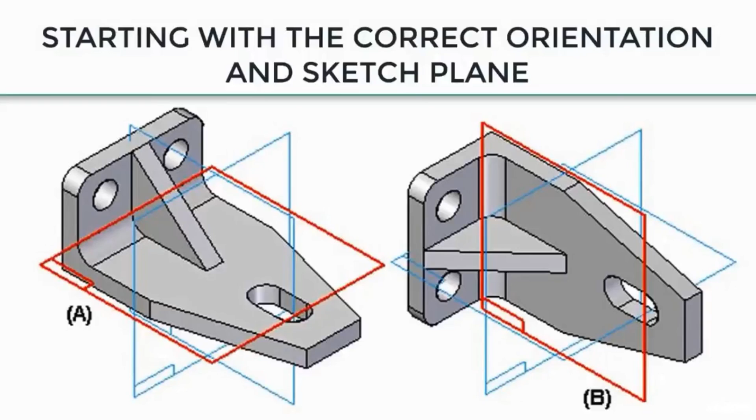Now it's important that you draw your parts in the correct orientation. You could draw this part in any orientation, but it's really annoying if you go back to the isometric view, Control I, or you go back home and the part's always flipping over on its side or upside down. So you need to understand where you are in 3D space.

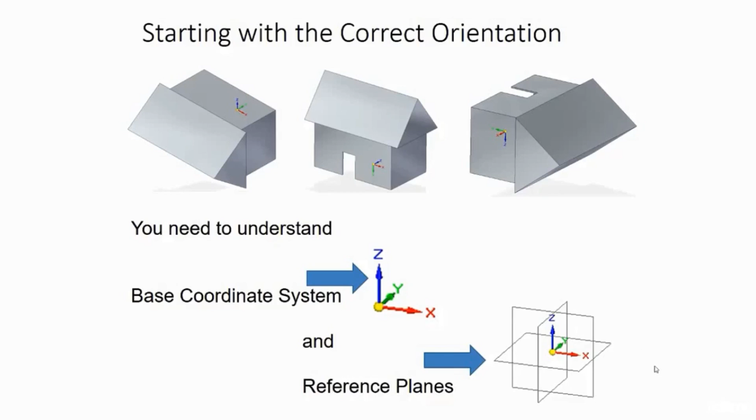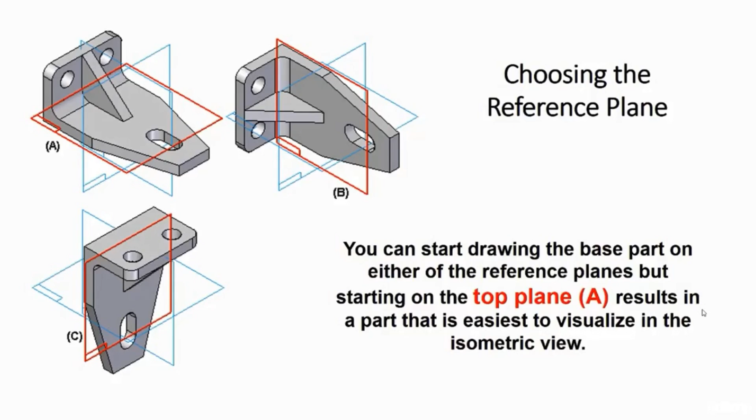Now you could start drawing the base part on either of the reference planes, but starting on the top plane results in a part that is easiest to visualize in the isometric view. Now the next decision you have to make is, where do you start the part? There's lots of different ways to start a part. You could start here with sketch A and push this across and cut off these edges. You could start with B by drawing this back piece, or you could start with C.

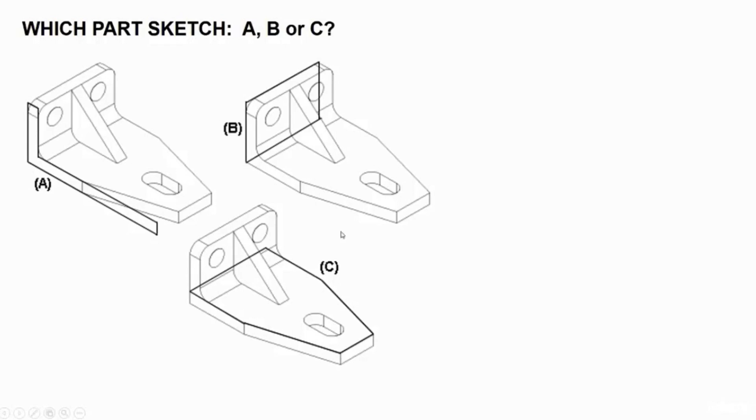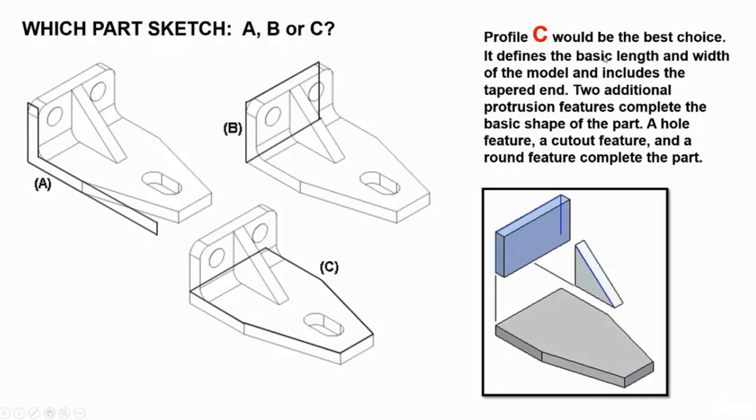Now another really important thing to do is, when you look at the model, break the model down and take out all these smaller features. Take out the holes and imagine it without this slot here. What would the part look like? It would break into 3 pieces. And in this case, profile C would be the best choice. It defines the basic length and width of the model and includes the tapered end.

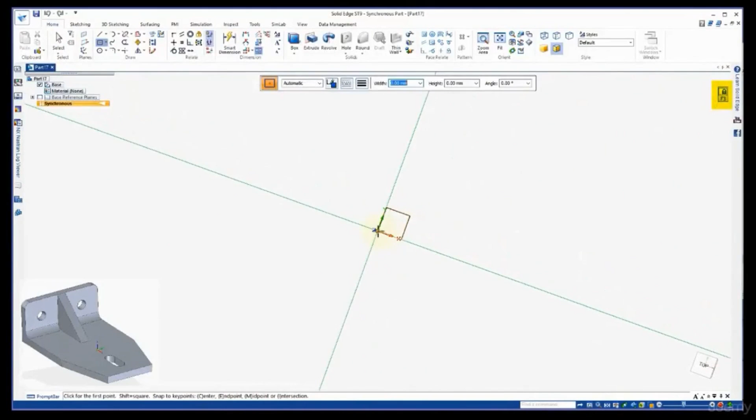So let's go ahead and draw that part. I'll start with a rectangle by center, and I'm going to spin around to the top view, and I want to make sure I lock to that plane, and I see the lock up here, and I'll just draw a rectangle about the shape. And this is just the concept model. And then I'm going to go down to my sketch view and lock to that.

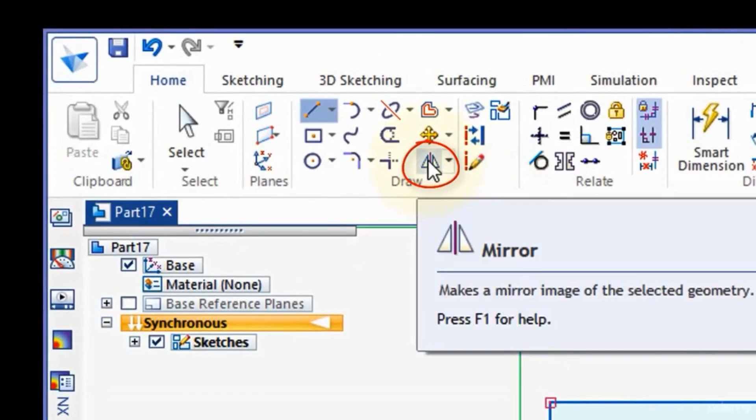I'm going to come up here and draw a couple of lines right from the edge there. I could draw another line here, but I'd like to show you the mirror command. I'm going to select the mirror command, select the line, and I'd like to mirror around the x-axis. And so there's a mirror copy of that. Now I'm ready to extrude this down. Again, it's just a general concept, and I don't want this to mirror, so I just want to push this down.

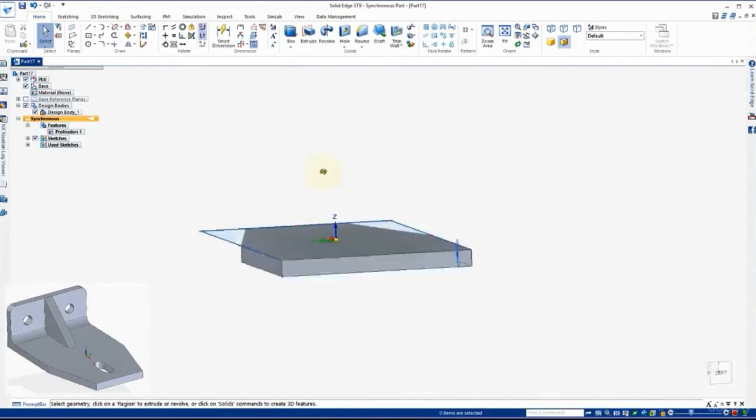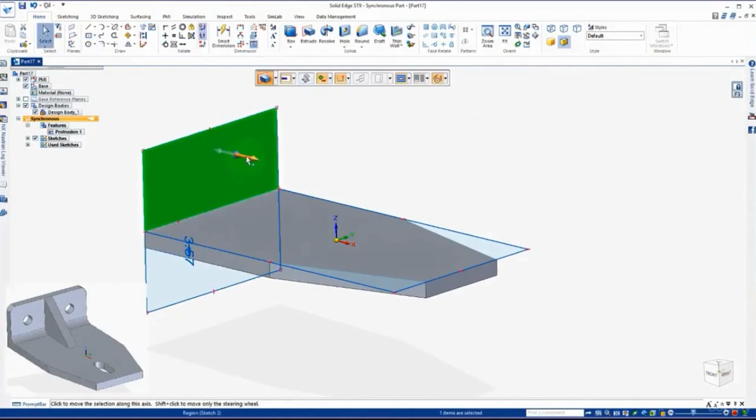Now I'm ready to add the back piece, so I'll spin it around to the back, and I'll go to the rectangle again. And I want to lock, so I'll lock back on. I'm going to draw a rectangle right at the center, and I want it to come out, say, this far, and the back is about that big. I did it like that because all I need is this one region. Once I've got the region, I can just pull that in. And again, just a general concept.

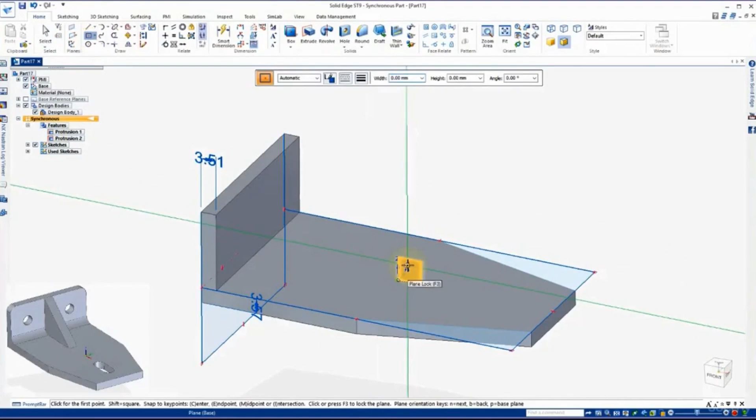And now I need to put this center piece in here. It was critical that I drew this around the axis. If I hadn't done that, I'd be having problems right now. So again, I'm going to go to the rectangle command, and I'm going to use this center axis, the XZ, lock to that, check it in my sketch view, and this time I'm actually going to use a rectangle by 2 points. I'll pick on this bottom corner here, and there's my height, and bring that out about how far the triangle goes out. Then I'm just going to draw a line from the top to bottom.

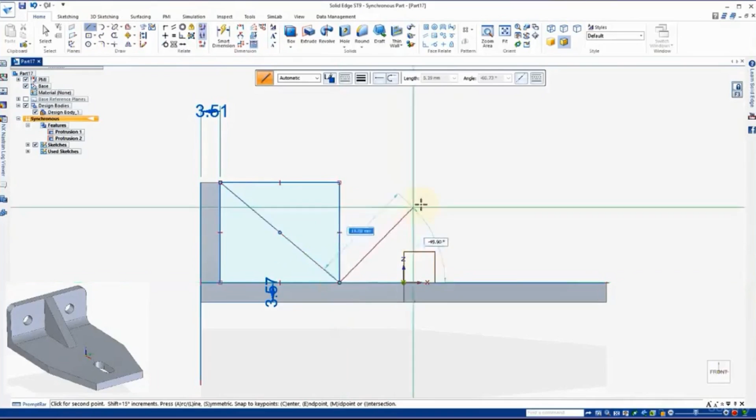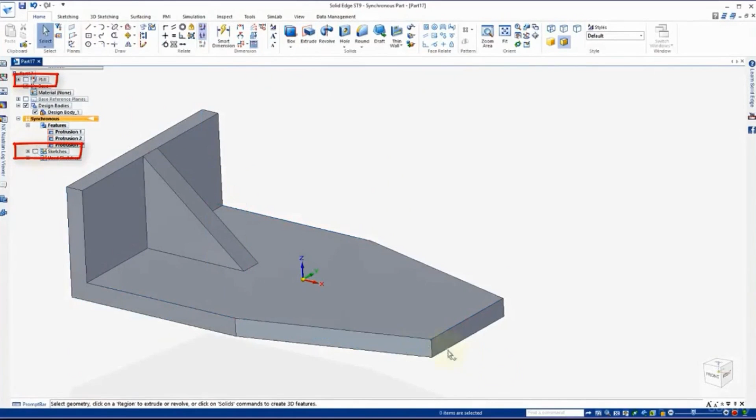Again, many ways to do this. I just wanted to create a region though. So I go to select, and I pick this region, and you'll see as I pull this out, I actually want it to mirror both ways because this is in the center. So I'm going to use my symmetric option and pull that out. Now I can turn off my sketches. I'll fit my view, and I'm ready to do the holes.

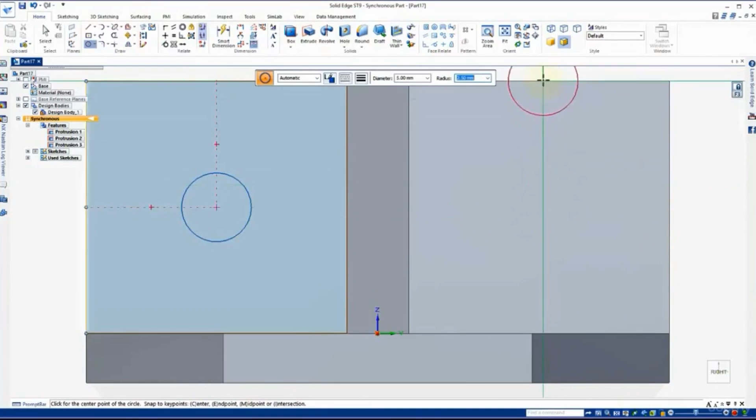So I'll go out and pick this reference plane, and I'll go back to my sketch view, and I'd like to center this, so I go to the center of this line, and there it is. I'm going to put in a number here, say 5. And why do I do that? Because I've got another circle to put in over here at the center. So once I find my center, I know that is also 5. I'll just identify these 2 regions, hold down the control button, push that through. And I've just got this one last slot to do.

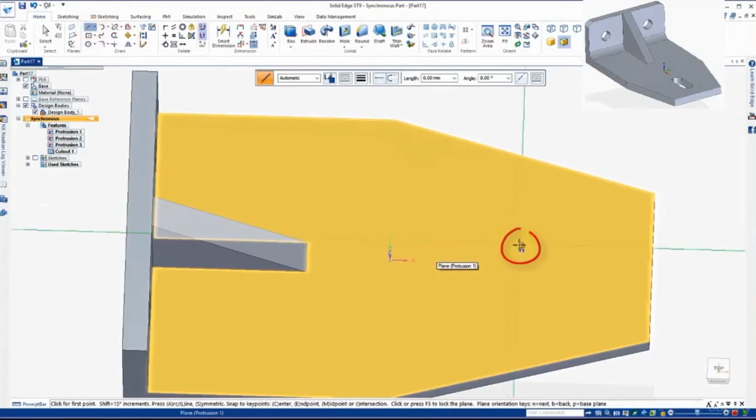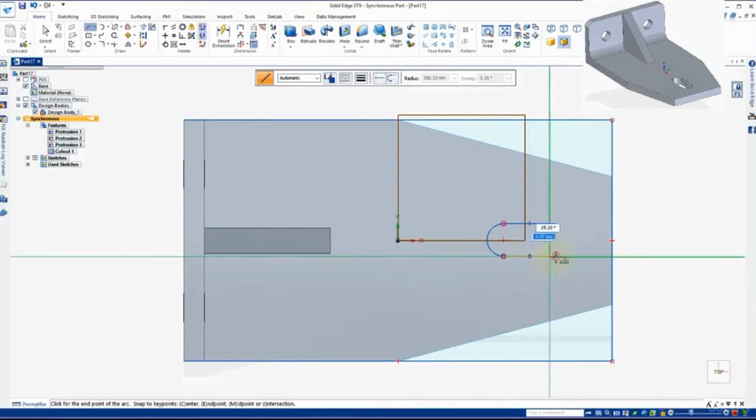So I'll come out here, and I'm going to start with a line command. Again, a number of ways to do this, and I want to be on this face here. I'm going to start sketching just the general concept right here. I'm going to hit A for arc, and come back over, line up, and again I could just pick the arc from here also, and see it's not going where I want it to, so I come along. Remember how I run along there and bring it back around. And my constraints are on there.

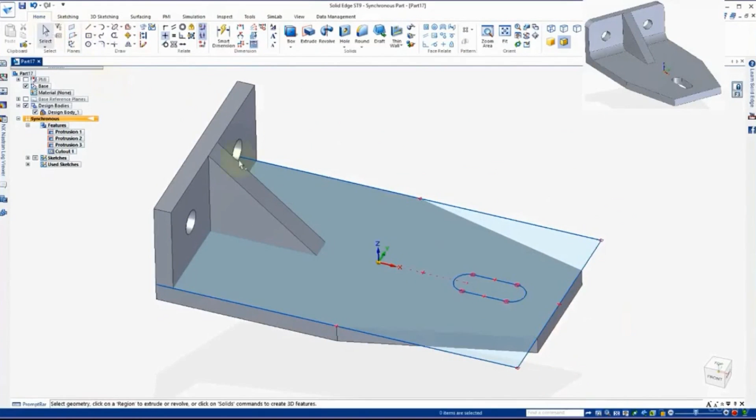Now one thing I do need to do is make sure this is centered. I want the center of the circle, and I just sweep across center of the circle to line up with my axis for the center of the part. So now I'm ready to project that all the way through. I come out and pick the region and drop that through. And one last thing, I need to round the edge right here, and I'll put in about 3. Again, just a concept model.

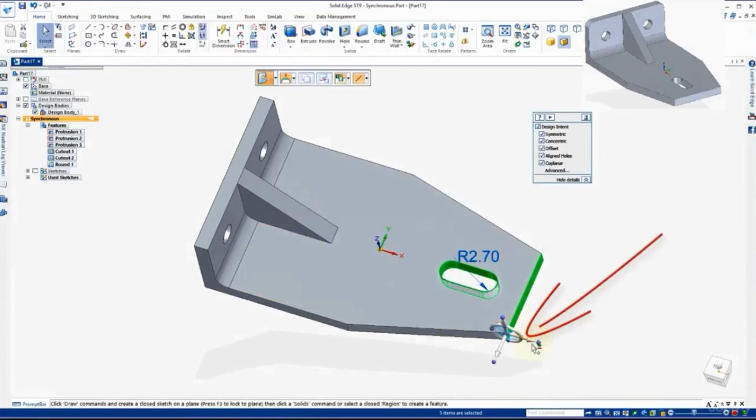Now, if I want to make adjustments, I'll turn off my sketch here. If something doesn't look right, I could pick just the slot here, or I could go and pick the whole front end here and say I'd like to move this in a little bit and adjust that accordingly. Now, there was one thing I did miss here. I forgot to add rounds on this top edge here. So I'm just going to click this edge and add the rounds, and there's my finished model.